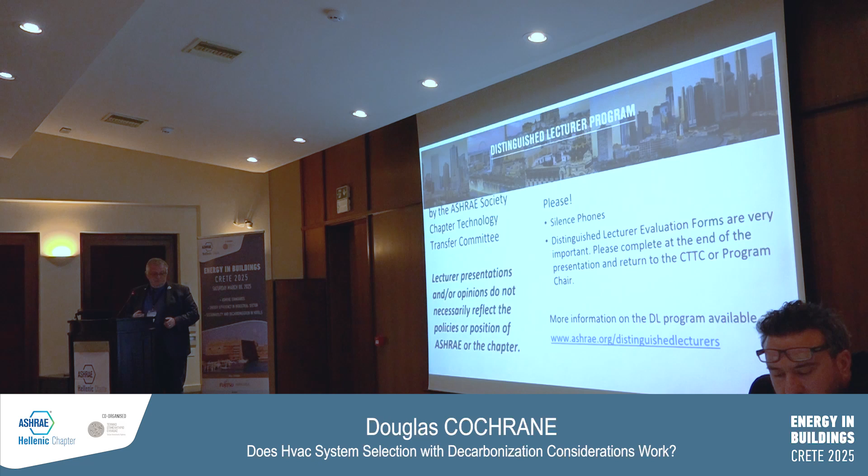The next one is, ASHRAE is a volunteer organization. We rely on members to do a lot of the work. So be it standards, be it technical committees, be it any of these standing committees within ASHRAE, we're looking for input to do it. I'm not sure how many people here are aware, but you can go to ASHRAE.org under technical committees and sign up on the spot. So if you're interested in renewable energy, you're interested in chillers, whatever the game may be, there's a TC, there's over 100 of them. You can sign up online and become what's called a provisional corresponding member.

Once you do that, you'll get all the correspondence. So it's not necessarily that you have to attend the meetings, but you can see what's going on and see if it's something that interests you and see if you want to be involved. So I strongly encourage everybody to do that. The other thing is, you can either be nominated by your chapter at the CRC, the Chapter Regional Conference, or you can self-nominate. So if there's something you want to do, please nominate yourself, because like I said, it's volunteers that make society work.

The last thing here is ASHRAE has a new strategic plan. How many people here knew we had a new strategic plan coming up? Okay, there's a couple people in the room. The last one was 5 years. They've made this one 3 years. We're trying to be more agile, more being able to move things quicker because times are changing. So the specific goals, you can see across the top, we want to be a global leader. We want to have impact-based engagement. The accessibility of ASHRAE. We want to try and make things easier for people to see.

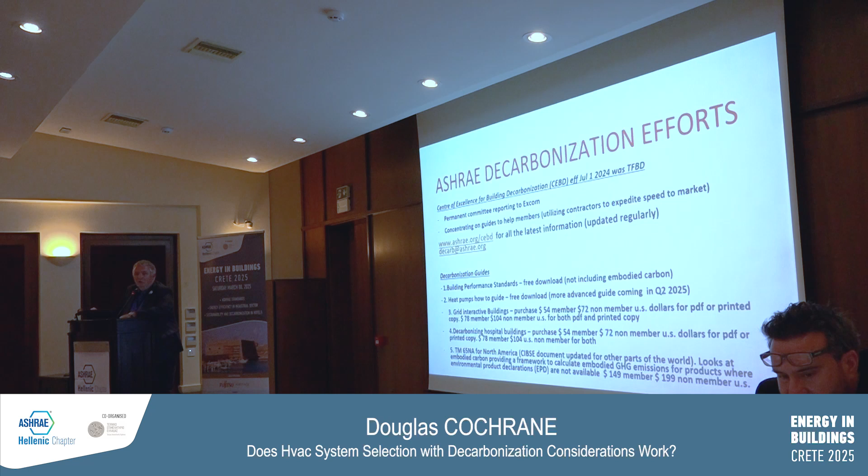The web link is there, ashrae.org/CEBD. It is updated regularly. I strongly encourage you to check out that website if you haven't already. There's new stuff coming online all the time. And the other thing, if anybody has any questions or comments, you send it to decarb@ashrae.org, so that can be passed on to the CEBD.

So one of the big focuses when we created that Center of Excellence for Building Decarbonization is we said we need to get the members information. So the best way to do that is to create guides. And that's what we've done in terms of trying to get information into people's hands quickly. The first one to come out was on building performance standards, to help people, what can you do to have carbon in your building performance standards wherever you are in the world? And that is a free download. No cost to you to do it.

The other one that came out is a heat pumps how-to guide. So if anybody doesn't know, that too is a free download. So I strongly encourage you to take a look at that if you haven't already. I can tell you they're working on an enhanced guide, which is due out later this year. But the initial information is out there. The other one that's been published is the Grid Interactive Buildings. And you can see the prices there. Decarbonization of hospital buildings is another guide that is out there.

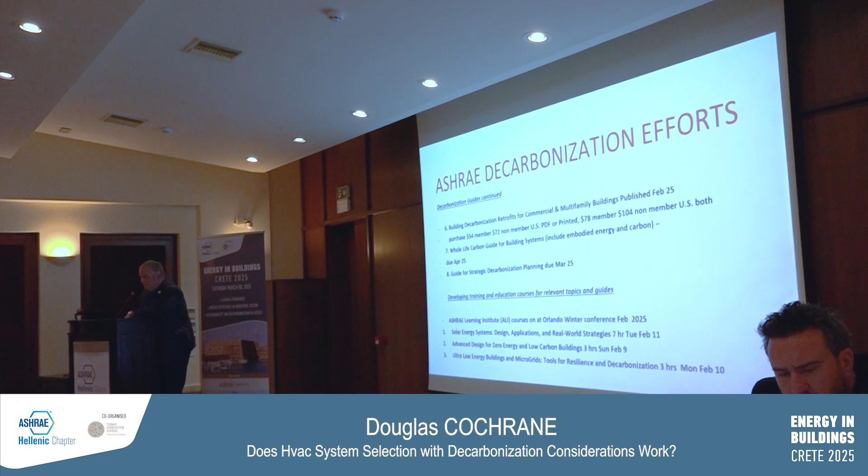So these were the ones that were done in Orlando. So that gives you the ones that we did do in Orlando. Solar energy, advanced design for zero energy, ultra low energy buildings and microgrids. That's the timeline of the technical guide series schedule as it currently stands.

The initial plan was to try and get this done during Ginger Scoggins' year last year. Unfortunately, it didn't happen, but I can tell you one of the things they're doing to try and speed up to get things out to you is using outside contractors rather than ASHRAE volunteers to get things done. So there's a cost to do that, but it also gives you speed to market.

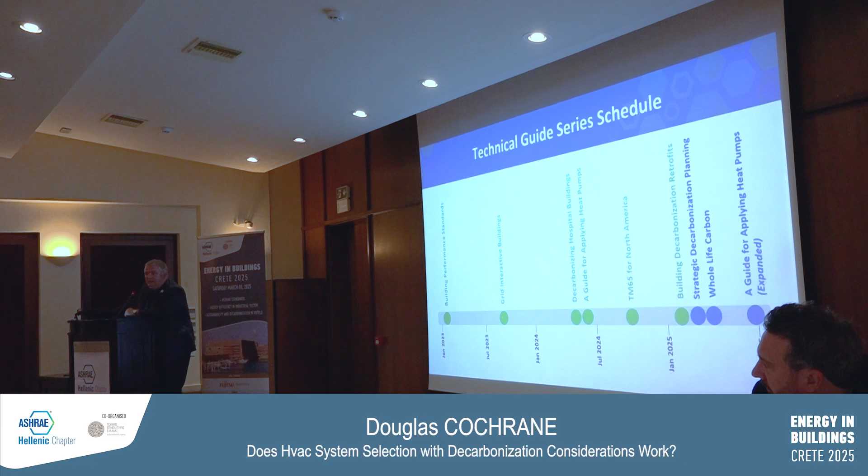And I can tell you the CEBD has been very cost conscious on what they're doing, whether it's done by members or done by outside people. But they've done a very good job managing the money.

In terms of the training, the one is complete on grid interactive buildings. Decarbonization of hospital buildings is undergoing another review. Decarbonization of building thermal systems is in its latest revisions with the contractor, Heat Springs, and the building decarbonization retrofits for commercial and multi-family buildings has not yet started.

It's on the list. This gives you an idea of the timing on when they're hoping to get stuff out. The plan is to have all these out before the Phoenix annual meeting.

Some future courses. How to apply whole life decarb strategies to new building design, heat pump application and operation, and a building decarbonization audit. George was talking about energy audits earlier. One of the things that we really need to do is make sure that carbon is part of any energy audit. You're not just looking for energy savings, but you're also looking for carbon.

And one of ASHRAE's focuses is to make sure carbon is in everything we do. So whether that's in a handbook or whether that's in a standard, making sure carbon is in it. So one thing ASHRAE is trying to do is standardize all the carbon things that are in all the standards. Believe it or not, there were conflicting things between them.

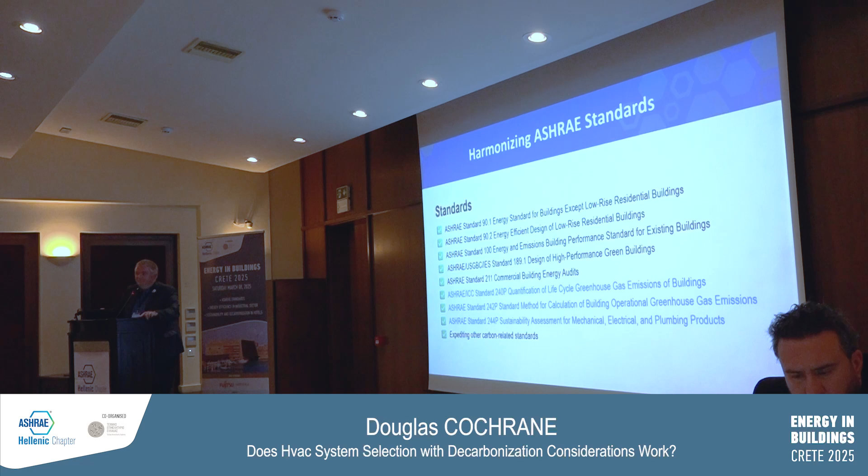There's also standard 242P, which is standard method for calculating building operational greenhouse gases. And standard 244P, which is sustainability assessment for mechanical, electrical, and plumbing. So 90.1 is supposed to be carbon neutral by 2031. So the committee has a lot of work to do to try and achieve that, but that's what the goal is.

Okay, training and certification. The certified decarbonization professional is something ASHRAE came up with. I was part of the initial cohort that wrote the first set of exams. There were 64 people that passed that exam. It's now up near 100. It's one of the most sought after certifications ASHRAE has. They are working on a guidebook for that certification that is due out in the second quarter of this year.

So you can see here, and this is a screenshot from the actual website at ashrae.org/decarb, the training that we have. So the Intro to Building Decarbonization training is a 3-hour course. I've actually taught that as an ALI instructor. That's one of the ones that's available now. Looking at more courses that we've outlined to try and get the information out there so people can get updated as to what they're doing.

What CEBD did is they have a strategic planning session every year. And I don't know if people noticed, but if you looked at the membership survey you got the last time, there were actually some questions that were carbon related. They used some of that stuff to come up with what we want to focus on. So they actually had 23 things. They decided to go ahead with 7. I'm just going to go through what the 7 are, so you have an idea of what they're looking to do.

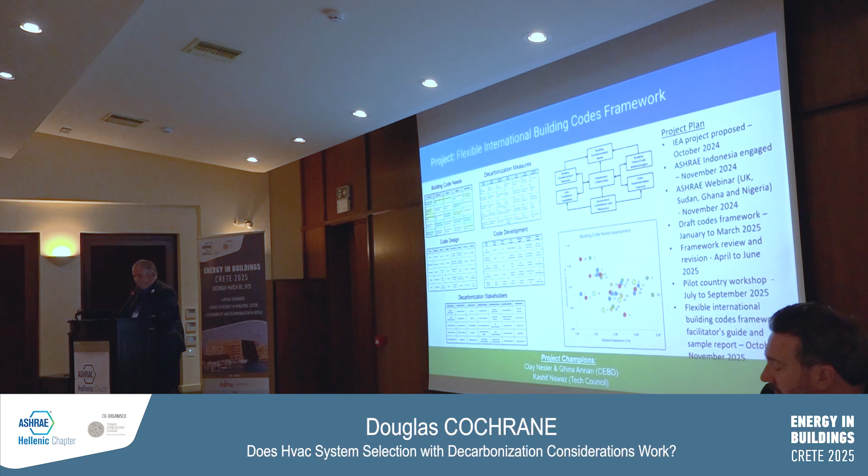The next one is updating the HVAC equipment service life. If anybody has seen the little pocket guide that ASHRAE has, the last time those equipment service life tables were updated was 2005. That's 20 years ago. So that needs to be updated. We have to understand what the actual lifespan is when we're doing these life cycle analyses, to be able to do a true comparison and know when that equipment is going to have to be replaced. So we need more updated data. Whether that comes from a lab, whatever, we need more data than what we have currently.

A whole life carbon gap analysis. So we've got to analyze the gaps that are out there in whole life carbon. If anybody has done whole life carbon analysis, you know there's a lot of details that are missing or you have to make some assumptions. We're trying to make that easier for people to get stuff done, and how we can make things better to be able to do it. And this is where ASHRAE is working with other global carbon accounting organizations, et cetera, to make sure we're doing the right thing.

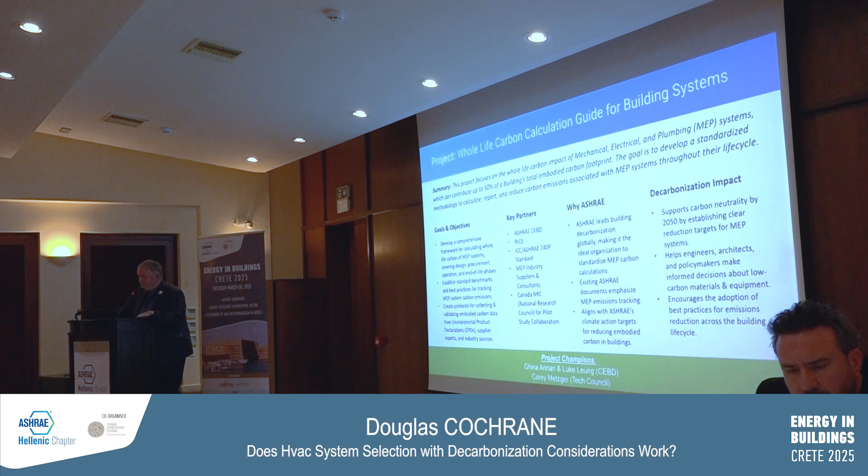A whole life carbon calculation guide for building systems, saying up to 50% of a building's total embodied footprint can be from your MEP systems. So the goal is to develop a standardized methodology to calculate, report, and reduce the carbon emissions associated with those systems throughout their life cycle. A whole building MEP benchmarking data research. We need more research to know what this is across the various building types, and that's where we're looking for the ASHRAE research group to finance that.

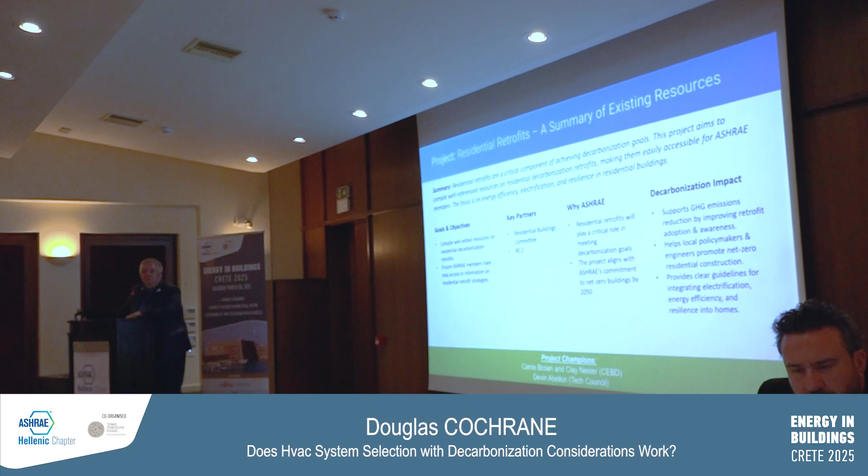Residential retrofits. We can't forget about residential. So we want to do residential retrofits and summarize all the existing resources we have. Obviously, our residential building committee and Standard 90.2, which is the residential energy efficiency one, are key players in that. But we want to make sure that we can reduce the GHG emissions in any residential retrofit.

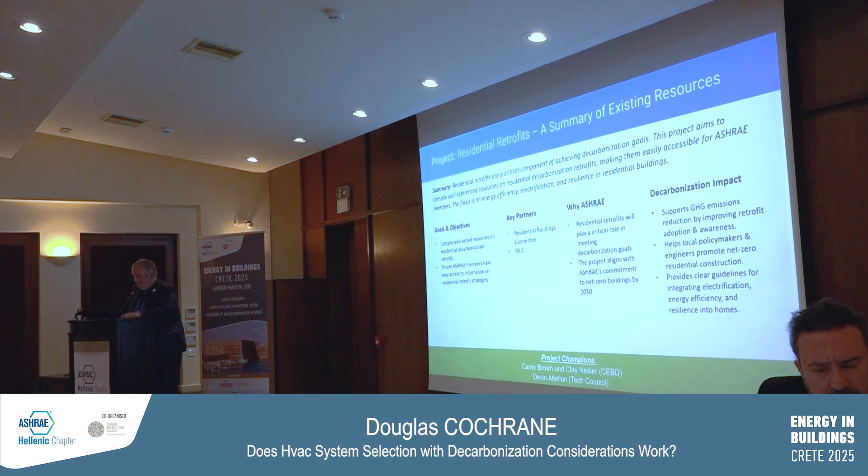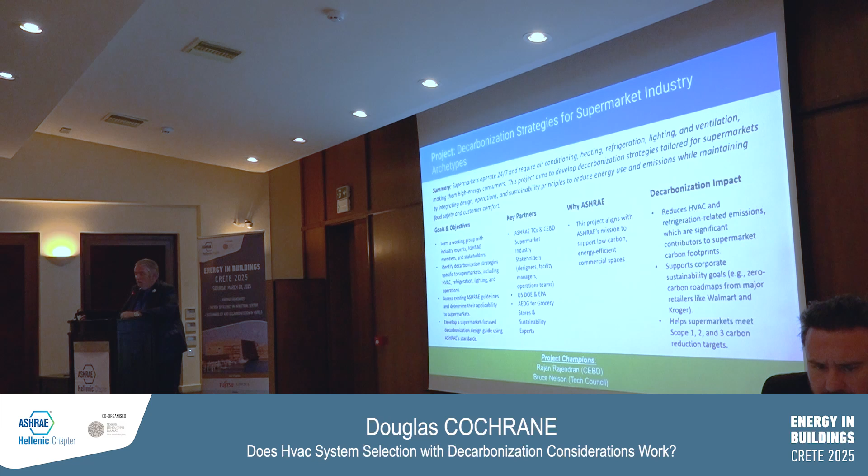Decarbonization strategies for the supermarket industry. Supermarkets, as you know, with a lot of the coolers and stuff, have a lot of potential there. They're using a lot of energy. What can we do to help reduce that and therefore reduce their carbon footprint? And this is, again, working with the experts in that industry to come up with a strategy to help improve and help members who are dealing with this.

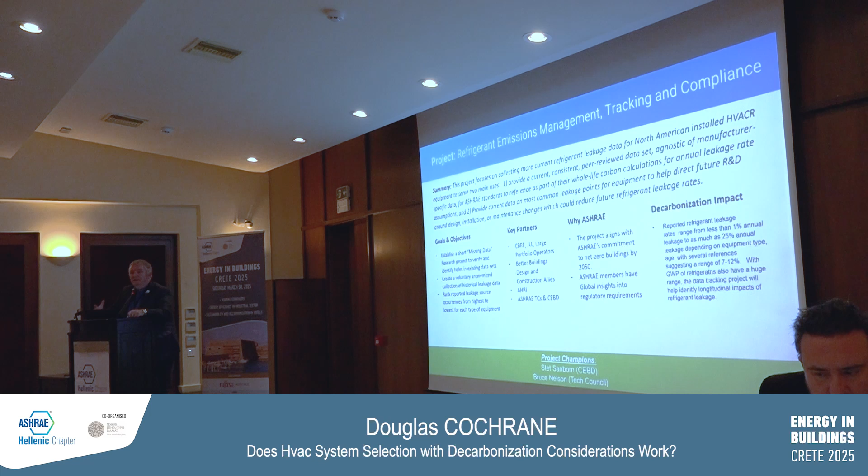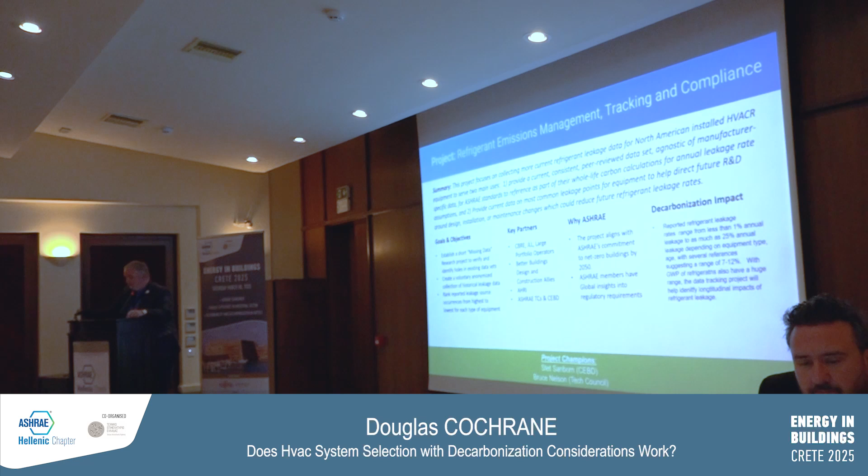This came up in Costas' talk. Refrigerant emissions data. We don't have good enough data, so we need more current data so that we get a better handle on what the actual refrigerant emissions are. So that's something that's being looked at right now. And if you look on the far right, the impact can be less than 1% to as much as 25% depending on the equipment type. That's a heck of a spread. We've got to try and narrow that down and get the right numbers in there.

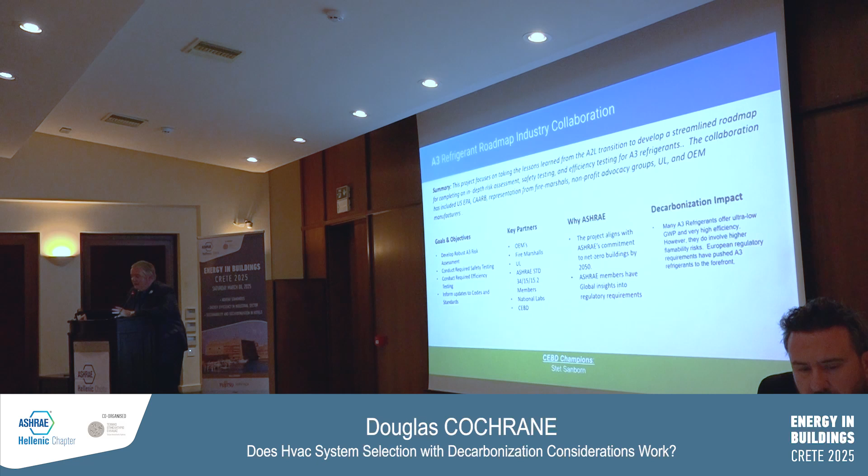A3 refrigerants. You guys are using, for instance, R290 propane in Europe. It's not being used currently in North America. There's a lot of concern with flammable refrigerants. So we've got to come up with a roadmap that the industry can use, sharing best practices for what's going on in Europe that can be applied in North America and other parts of the world.

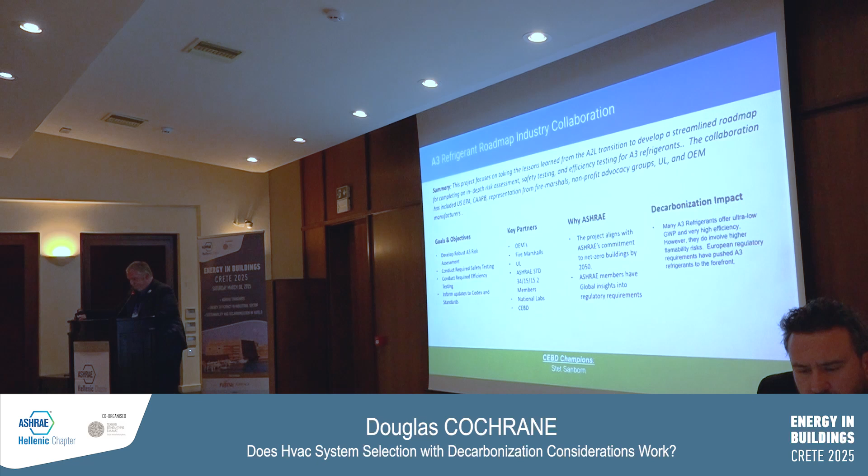Has anybody here heard of MEP 2040? Anyways, ASHRAE is a signatory to this through the CEBD. They are actually coming out with a guide on MEP embodied carbon that's due out April 22nd of 2025. So I encourage you to do that.

They currently have 32 projects that were just launched in February to get a better idea of what the whole life carbon is of that. So it's something that's really interesting. I think they did a lot of benchmarking and other data to make that work.

And lastly, AHRI, which is the authority that certifies what performance is for a lot of equipment. They're actually looking into this too. And we talked about EPDs, it's something AHRI is looking at as well, and what their milestones are and how they're going to do it, and they actually have set up a decarbonization standards technical committee.

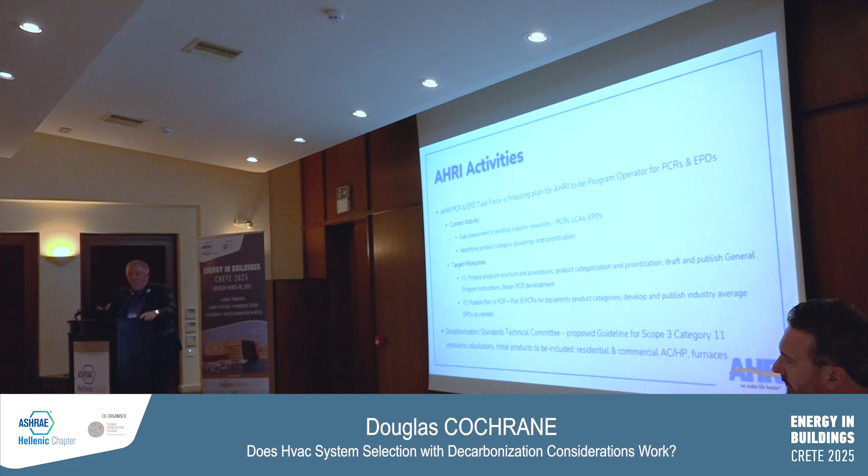So I know that's a lot, but I thought it was important for you to know ASHRAE is committed to decarbonization. These are the steps we're taking. This is what's here. They're looking for feedback. If there's something else you think ASHRAE should be looking at, please send that email to decarb@ashrae.org and get your input in. We're looking for feedback from members as to what's going on.

So that's what I had for, I got one more thing. There's a global advisory panel that held a meeting in Orlando in 2025. So trying to get everybody from around the world with a common net zero building definition, remembering one size won't fit all, but how can we make this work? And we really need the global south and everybody else to be in there. How can we all get together to make that?

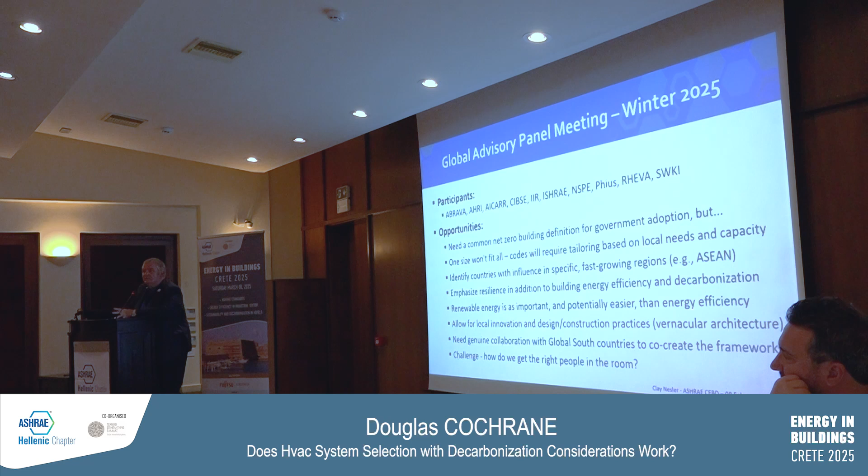So you can see who's a member of that. There are some people from Europe in this group. I think it's a great idea. And let's do some sharing of best practices, some brainstorming, and come up with the best thing that is good for all of us.

Lastly, there is a decarbonization conference coming up in Chicago if everybody's interested, October 22nd to 24th. I know in 2026, they're talking about having another international building decarbonization conference. I haven't heard if anything's been chosen, but I know it's being looked at. Greece started the thing in 2022 for our first international decarb conference, and then we had one in Madrid. So we'll see where they're going to do that, but I think it's a very worthwhile thing. And the plan is to have one in the US and one elsewhere every 1 or 2 years.

Okay, so that's what I had on that. I don't know if it's worthwhile taking questions on this now or move on to the HVAC selection. Anybody have any questions? I know it's a lot of information, but I just want to know if anybody has any questions on that. No, please move on. Okay. Like I said, if you want to give me the hook, do it.

Normally this presentation I do is interactive. Because I threw the decarb thing in, I'm just going to go through the information. You will get the slides. I'm happy to discuss this later because I like getting input from the crowd as to what they think. But we're just going to go through what some of the key things are you need to consider. A simple example and then wrap it up. So what are the criteria?

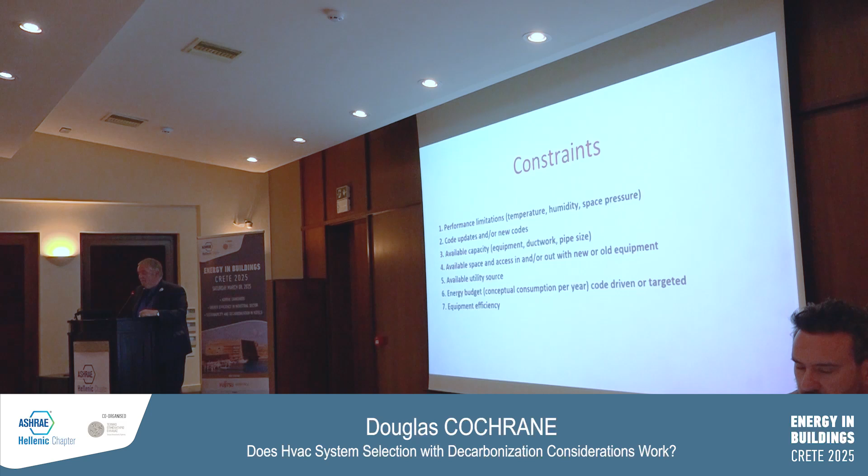Energy budget: is it cost driven or code driven? You have to take that into account. What's the efficiency? Most equipment now has multiple efficiencies. You have a base model, you have a high efficiency, you might have an ultra high efficiency. What is it you're restrained at there? Operator knowledge. Training for your operators, I think, is key in a building, especially a hotel, to make sure they understand the system and they understand the controls. The existing building occupants, building architecture.

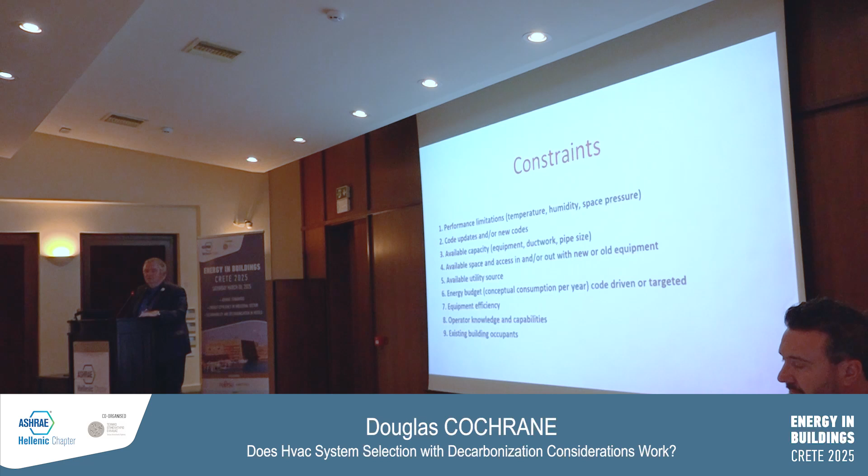You have constructability constraints. You might have structural constraints. Can the equipment you're bringing in be supported by the floor or the roof? How are you going to get the equipment in and out? Demolition and the impact on adjacent spaces and existing systems in operation. Here's the tricky one. If I have to maintain building occupancy and still have a system operating, what do I have to consider in order to make that happen?

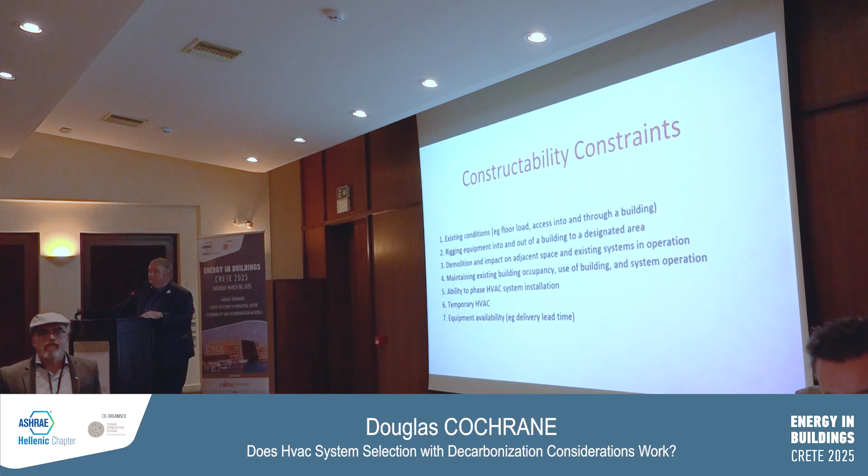Ability to phase in the installation if necessary. Temporary HVAC. The availability. Obviously, delivery lead times. I know things have improved a lot. During COVID, we had a lot of problems with supply issues, but you really got to look at what is the schedule and what equipment can I get in there to meet what's being done and make sure I maintain the construction schedule. And of course, the budget. So once you have everything done, the best thing to do is list all your possible options, break down the pros and cons for each, weigh the benefits versus the drawbacks.

Building envelope, something I think that doesn't get enough concern. You always have to look at the building envelope. I can tell you, I did a building that was an existing DeVry Institute of Technology. It was converted to a courthouse. They did not look at the building envelope. Put in a new VAV system. I get called because it was a minus 20-degree day. It's cold in the intake area, and it's unionized workers. And I just went over to the window, and I could just feel cold air gushing in.

I said, you have an overhead system? This is building envelope. It has nothing to do with it, it's envelope. Nobody looked at the envelope. And to make things worse, they said, oh, can you go look at this room? So I did. I'm doing a double take. He said, do I see daylight there? The two walls did not come together. So no wonder it's cold in there.

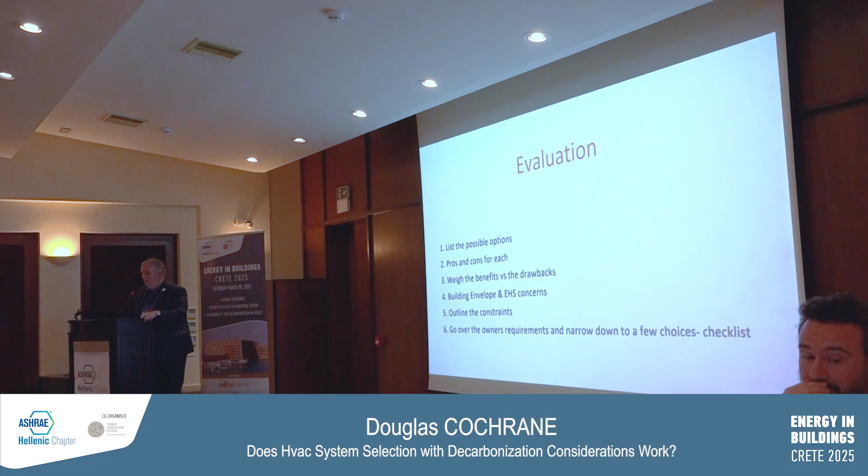Outline the constraints. Go over what the owner wants. The owner project requirements are very important. Narrow it down to a few choices and make a decision. In terms of decarbonization, energy consumption, obviously, the lower the energy consumption, the less I'm having greenhouse gas emissions. Electrifying. Can I electrify what I'm doing 100%? Personally, I think what's going to have to happen is it's going to be more of a hybrid approach. You can't electrify everything because a lot of grids won't support or have the necessary power to be able to do that. Refrigerant. What kind of refrigerant am I going to use? And I have to consider what the leaks are.

Manufacturing, energy consumption of materials. That's all that stuff we talked about for embodied carbon. That's all the embodied carbon components. Can I do carbon capture and storage if I have a large industrial process? Does the grid work? Can I send power back and forth if I'm able to put in renewables? And I think one thing that doesn't get enough attention, and it's probably not as applicable here in Greece as it is other parts of the world, is heat recovery. If I have a heating system and I'm putting all the hot air outside, can I recover some of that heat to use it elsewhere?

End of life impact. Again, that comes into the embodied carbon. I got to get rid of the equipment. It's going to take transportation. It's going to take materials to do it. What's that going to cost? So I do have a simple example. I know I'm over time, so I'm going to leave this, but it was a simple thing to say, I had an existing 6-ton unit on a roof. There's been a change in space. They've changed the way they're using it. It now goes to 7.5 tons. What needs to be considered? This is where I normally ask you for your input.

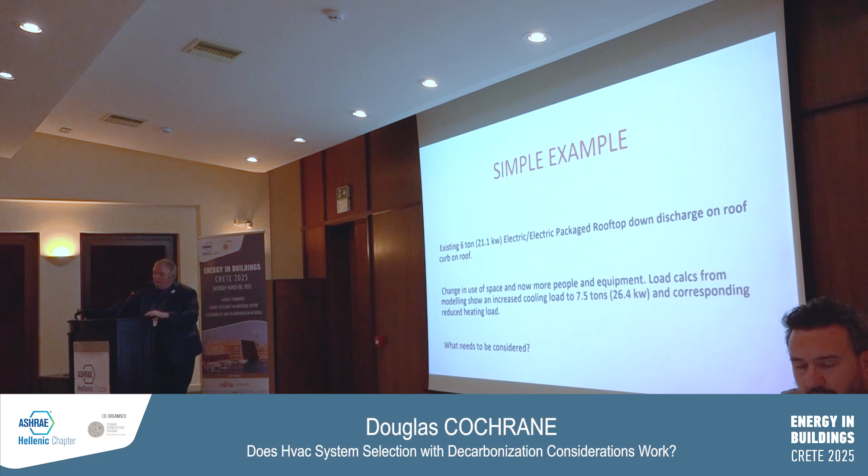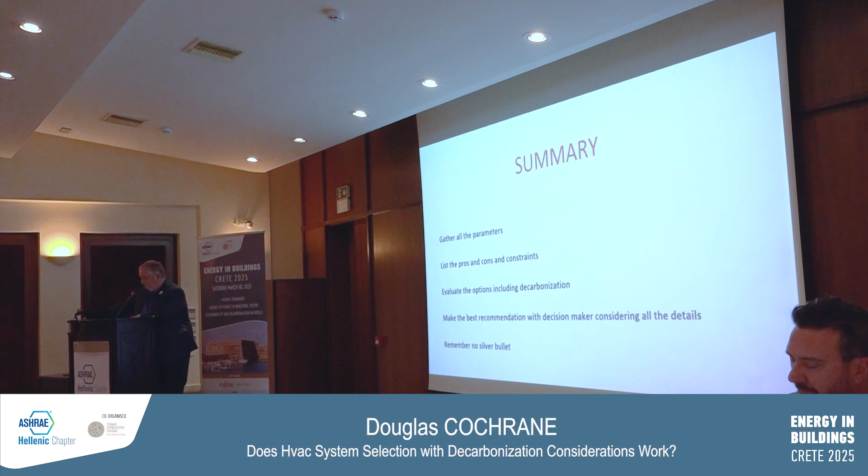So in summary, gather all the parameters, list the pros and cons and constraints, evaluate the options including decarbonization considerations, make the best recommendation, and remember there's no silver bullet. There's more than one way to do things. And with that, I apologize for going over, but I think it was important for you guys to know what's going on with decarbonization at ASHRAE.